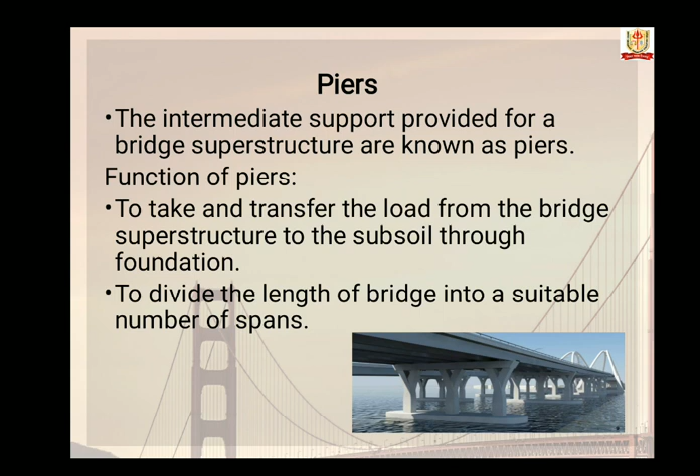Piers. The intermediate supports provided for a bridge superstructure are known as piers. Piers provide vertical support for spans at intermediate points and perform two main functions: to transfer the load from the bridge superstructure to the subsoil through the foundation, and to divide the length of the bridge into a suitable number of spans.

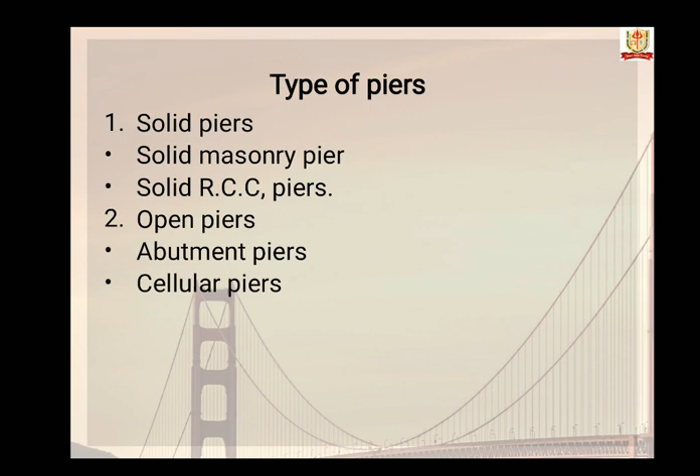Types of piers: solid piers and open piers. The piers which have solid section in elevation, plan, and view are known as solid piers. Solid piers are further classified into the following two types: solid masonry piers and solid RCC piers. Solid masonry piers are constructed of brick masonry, stone masonry, or plain cement concrete, used when the height is moderate.

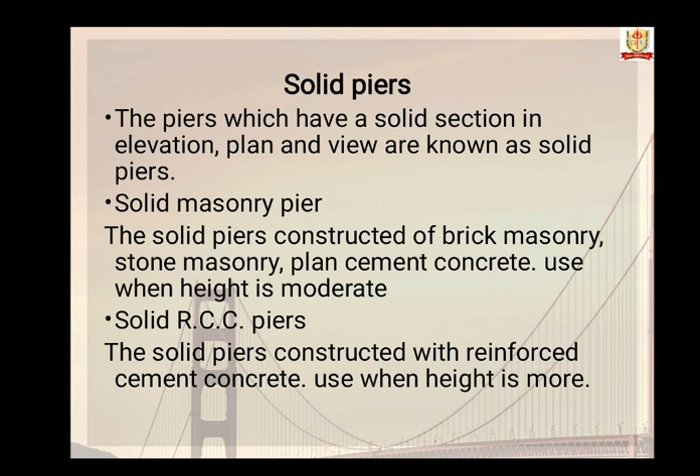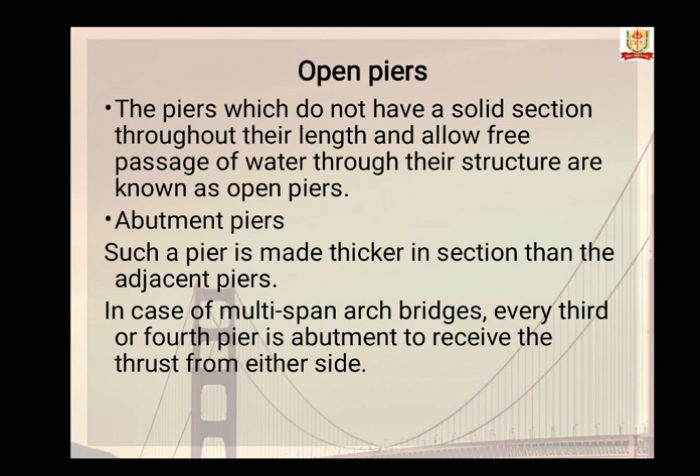Abutment piers. Such piers are made thicker in section than adjacent piers in case of multi-span arch bridges, where every third or fourth pier is an abutment pier to receive the thrust from either side. Cellular pier. These piers consist of two RCC cells connected by radial ribs at suitable intervals, and the intermediate spaces between the cells are filled with some cheap filler materials like loam, sand, gravel, etc.

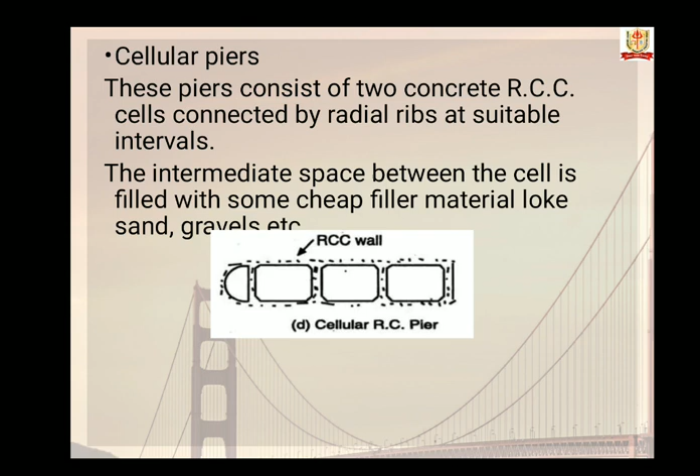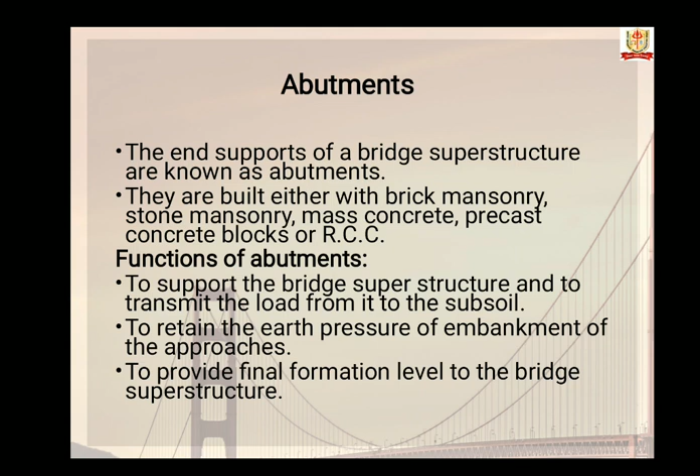Abutment with wing walls. These abutments are suitable in case when the height of the approach embankment is more, the velocity of flow of river water is high, and there is a danger of side erosion. Abutment with straight wing walls. These abutments are so called as these are provided with straight wing walls. This type of abutment is suitable for a bridge crossing a roadway, that is, in the case of an under bridge.

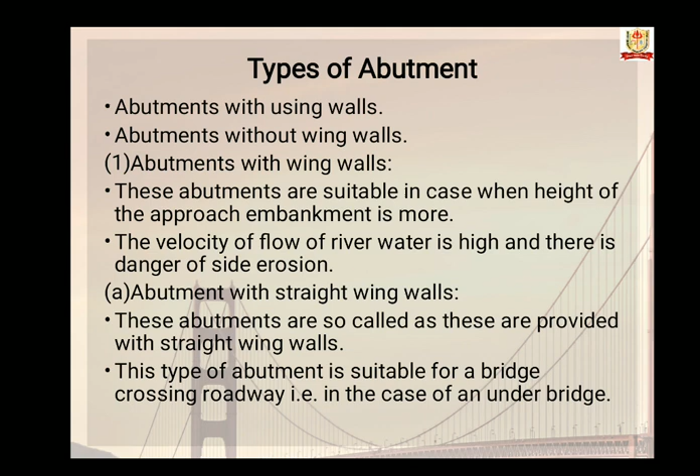Third type is abutment with return wing walls. These abutments are so called as they are provided with return wing walls. This type of abutment is also called a box abutment. These abutments are suitable in the case when the height of the embankment is more. Abutment with splayed wing walls. These abutments are so called as they are provided with splayed wing walls.

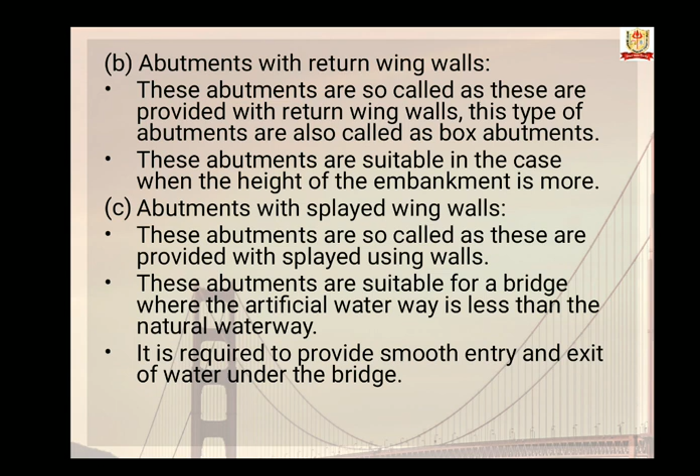These abutments are suitable for a bridge where the artificial waterway is less than the natural waterway, and it is required to provide smooth entry and exit of the water under the bridge.

Next type is abutment without wing wall. These abutments are suitable when the river banks at the bridge site are sufficiently firm, the velocity of the flow of water is less and there is no danger of side erosion.

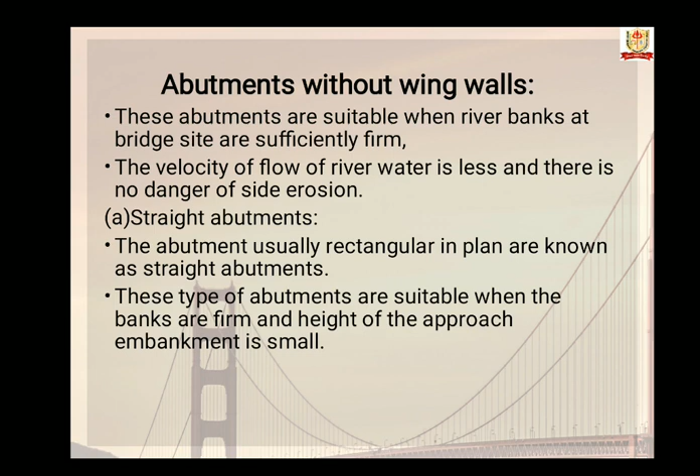First type is straight abutment. The abutments, usually rectangular in plan, are known as straight abutments. This type of abutment is suitable when the banks are firm and the height of the approach embankment is small.

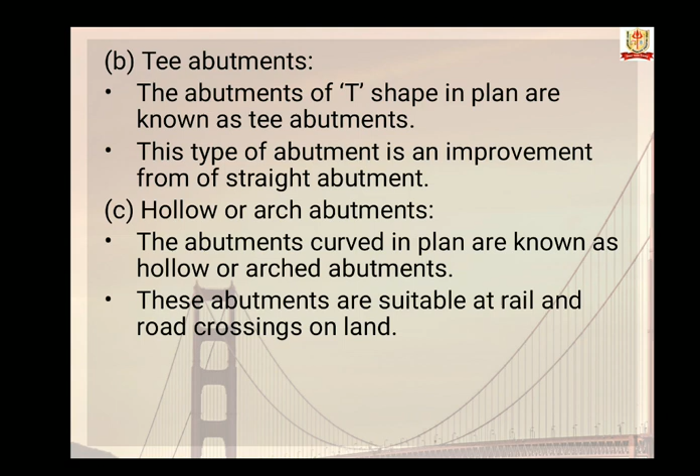T abutment. The abutments of T shape in plan are known as T abutments. This type of abutment is an improvement on the straight abutment. Hollow or arch abutment: the abutments curved in plan are known as hollow or arch abutments. These abutments are suitable at rail and road crossings on land.

Next is wing walls. The walls constructed at both ends of the abutment to retain the earth pressure of the banks of the river or of the bridge approaches are known as wing walls. The walls constructed adjacent to the abutment that act as retaining walls are also known as wing walls. The wing walls can either be attached to the abutment or be independent of it.

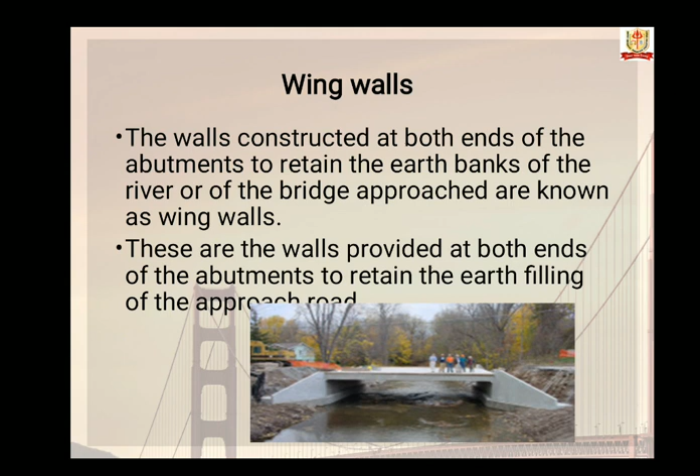These are the walls provided at both ends of the abutment to retain the earth filling of the approach road. Functions of wing walls: to retain the earth banks of approaches, in which case they are called return wing walls, to retain the lateral earth banks, to retain the earth bank of the river, and to protect the earth banks from the action of water if necessary.

Next is reinforced concrete wing walls. They are made of reinforced cement concrete and are used in case of high lateral pressure. The top of these wing walls is mostly kept either horizontal or sloping downward. As per their layout in plan, wing walls are further classified as straight wing walls, return wing walls, and splayed wing walls. Straight wing wall: the wing walls constructed parallel to the abutment at both of their ends are known as straight wing walls.

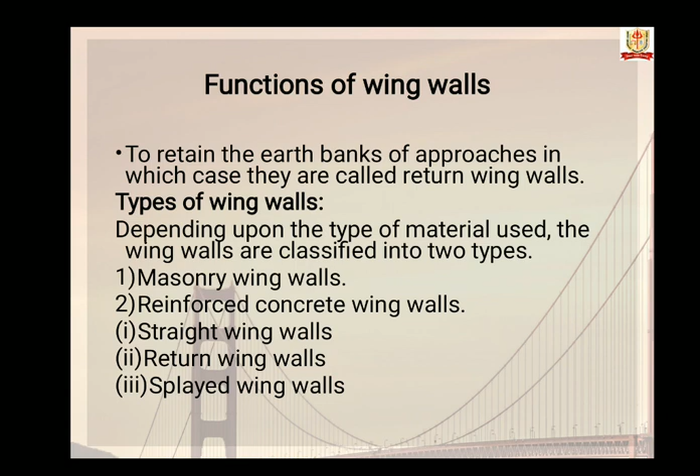Splayed wing wall. The wing walls constructed at an acute angle with the abutment at both their ends are known as splayed wing walls. These are used for bridges across the river. They provide a smooth entry and exit of the water. The splay is usually 45 degrees. Their top width is 0.5 meter, face batter is 1 in 12 and back batter is 1 in 6. Weep holes are provided for drainage purposes. So these are the types of wing walls.